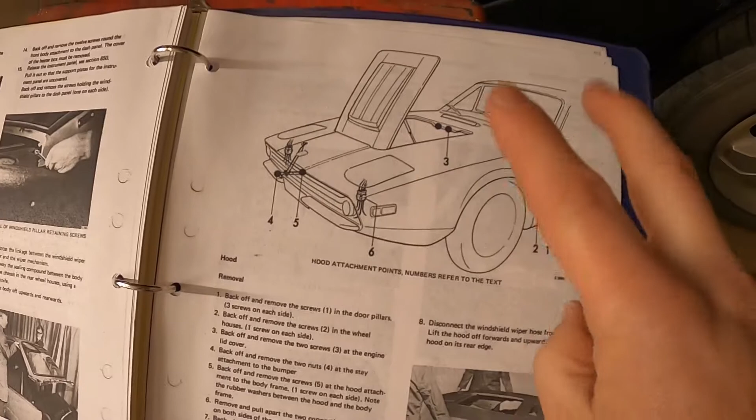Here's the chassis. Isn't that cool? Removal hood. Here we go. So that is the whole clamshell. They call this the hood and that the bonnet, but I'm gonna call that the clamshell. And there it comes off. So we're gonna do that.

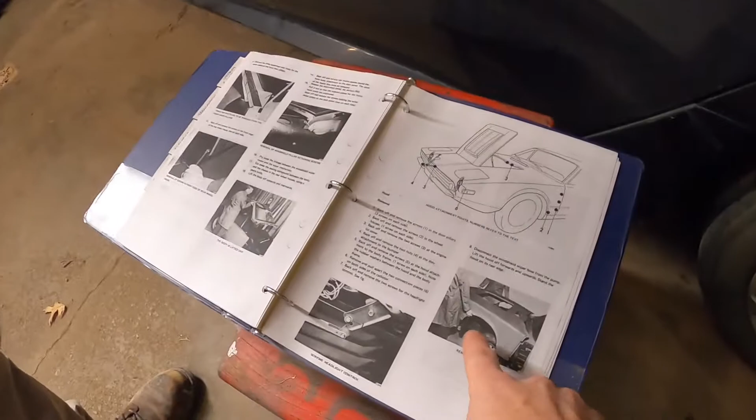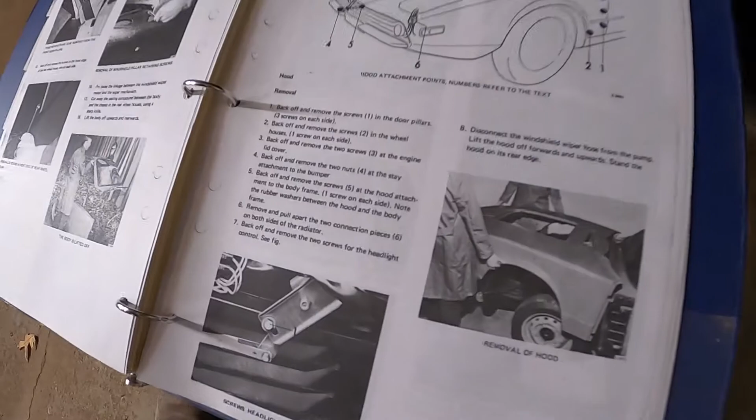Do you wanna be a historical reenactor for the Saab manual? What does that mean? We're gonna be those guys. Oh yeah, sure. It's like Civil War reenactors, but we're taking apart Swedish cars. I don't have a Swedish jacket like that. We might have to go sew some jackets real quick and come back. Okay. No, we'll skip that.

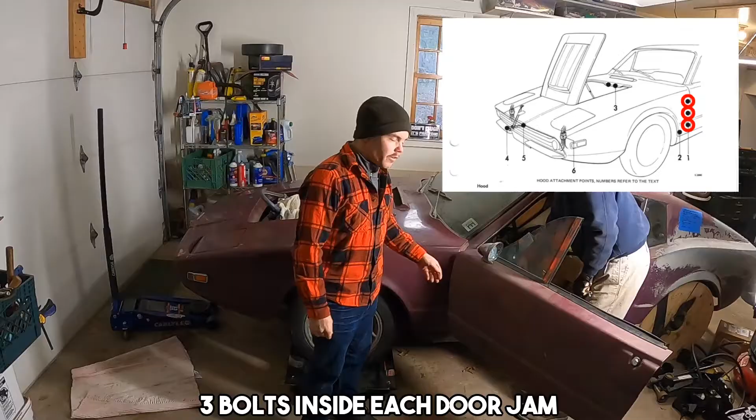All right, we're gonna call out instructions as we do it. I'll try to put it on the bottom of the screen and we'll see how it goes. First, we have 3 bolts inside each door jamb. 7/16. Make sure you have a nice wide garage because we have to put this on dollies to make sure we can get the other door open.

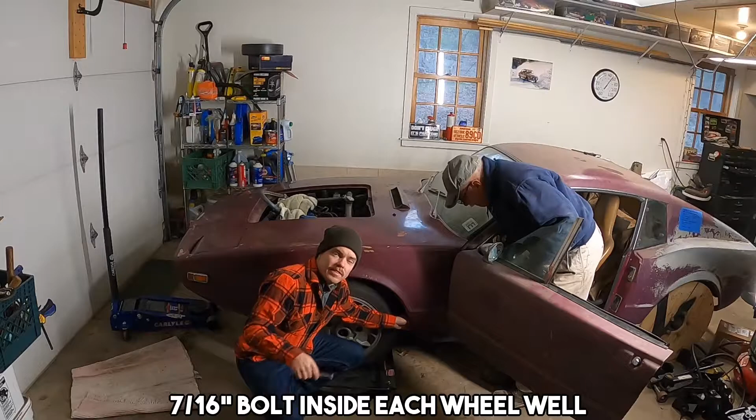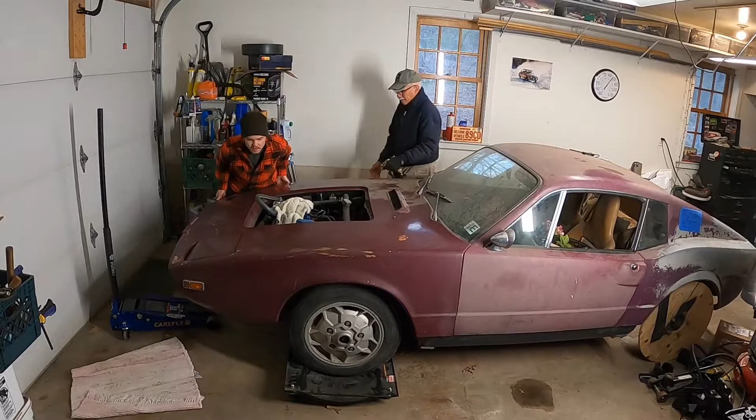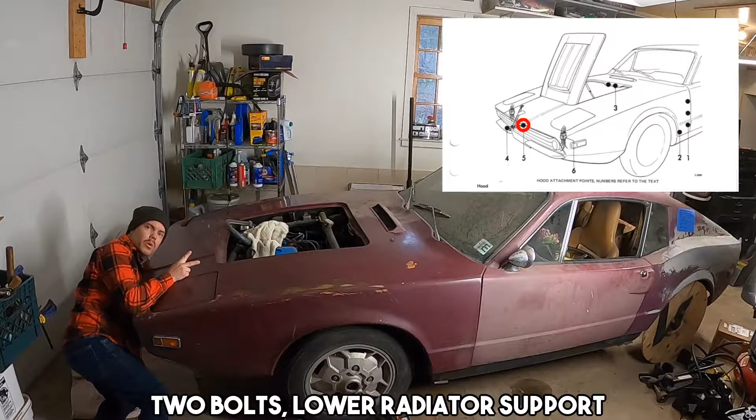We got 1 bolt on each side inside the wheel well. Right here, that's 7/16 as well, and it just screws out inside. We have 2 screws for the hood latch. We got 2 bolts down at the core support at the bottom. 2 nuts at the attachment to the bumper. That looks like this. 2 on either side.

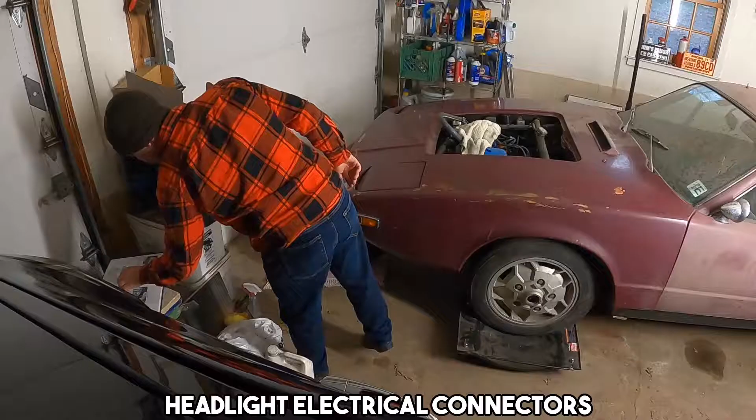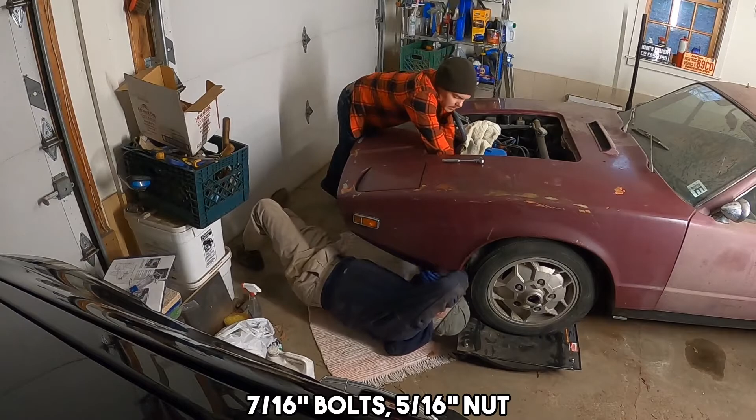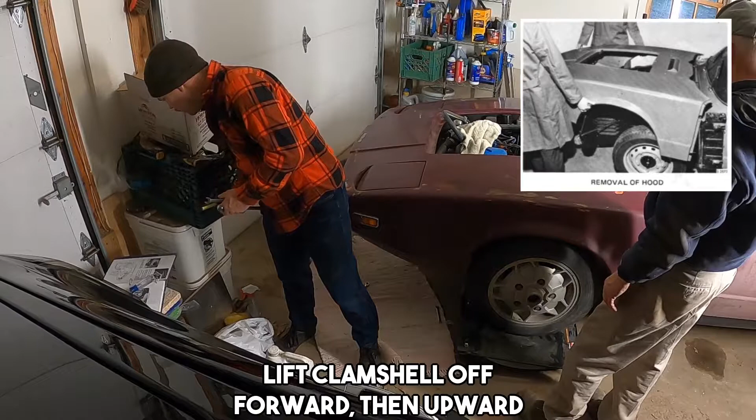We have 2 electrical connectors, 1 for each headlight. So I'm gonna take those out now. Back off and remove the 2 screws for the headlight control. See figure. Disconnect the windshield washer hose from the pump. Lift the hood off forwards and upwards.

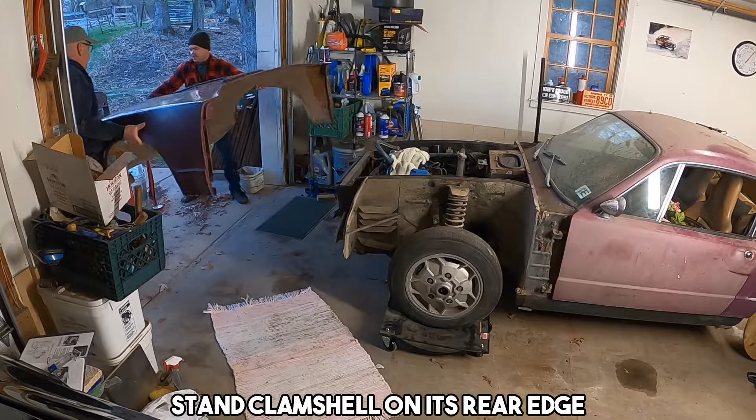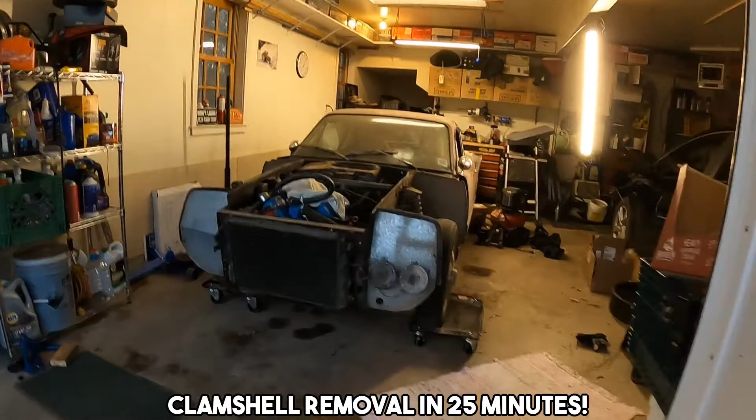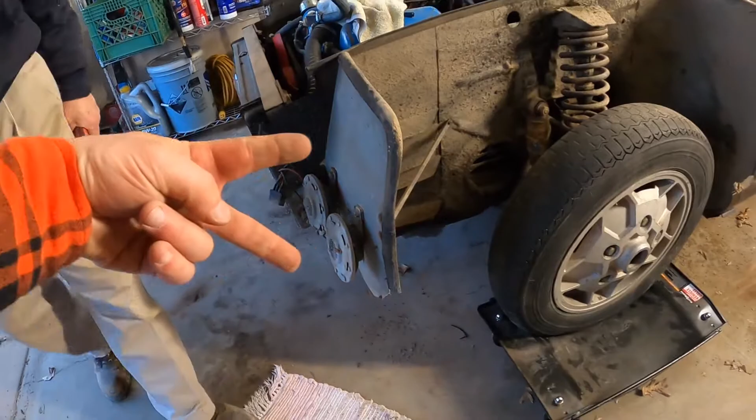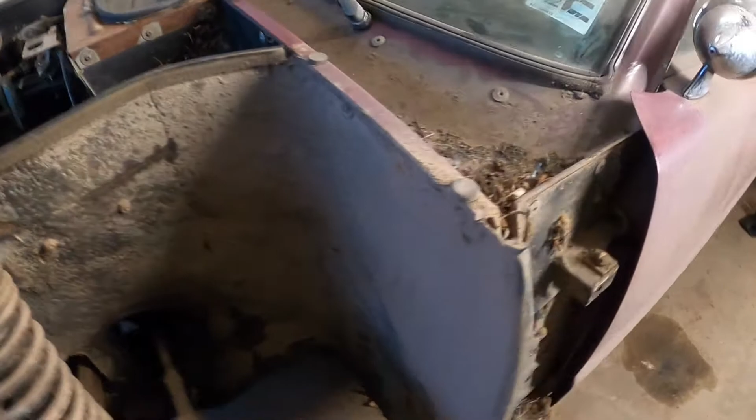25 minutes later, I guess, we get the thing off. That's what the Sonett looks like without a clamshell. So these are what we're getting hung up on because the car kind of wedges onto those. Very cool. Got some needles on here. Got some gross stuff everywhere. Oh yeah. Lots of stuff to clean out. Hey, at least that's fiberglass and not metal. Oh yeah, these pine needles.

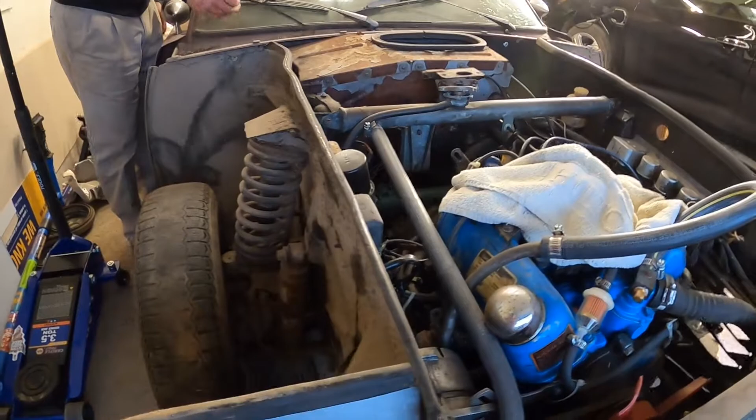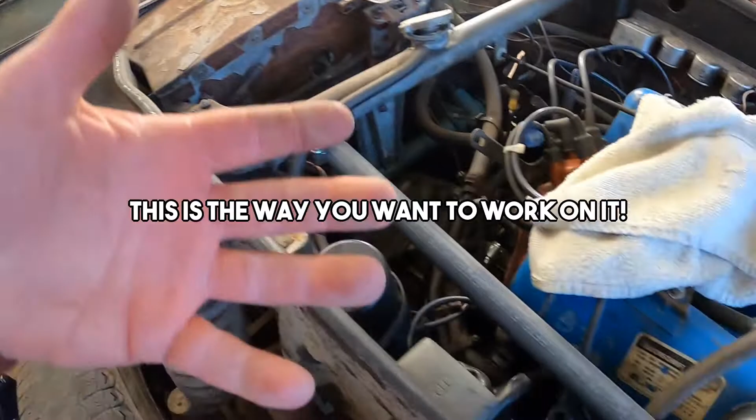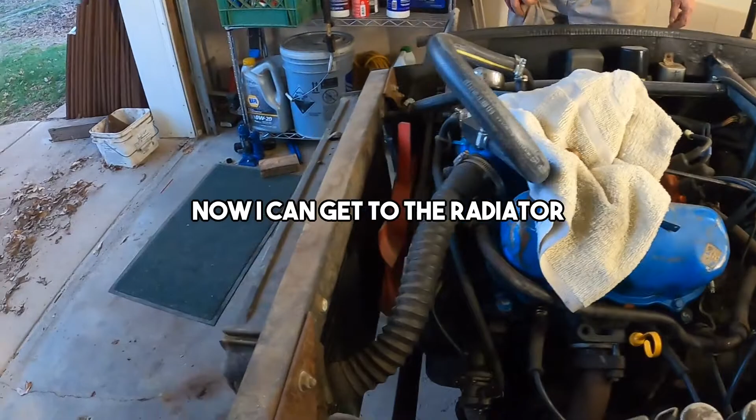So, this is really the way you want to work on the car. Wiper blade. Oh yeah. Nice. Glue that back on. This is really the way you want to work on it because you can get right up. You know, you stand right next to the engine. Somebody must have had a tarp on this once. Yep. So now I can get to the radiator super easy. Just a matter of 4 bolts. And that's what I was doing when I did the radiator hose in the bottom.

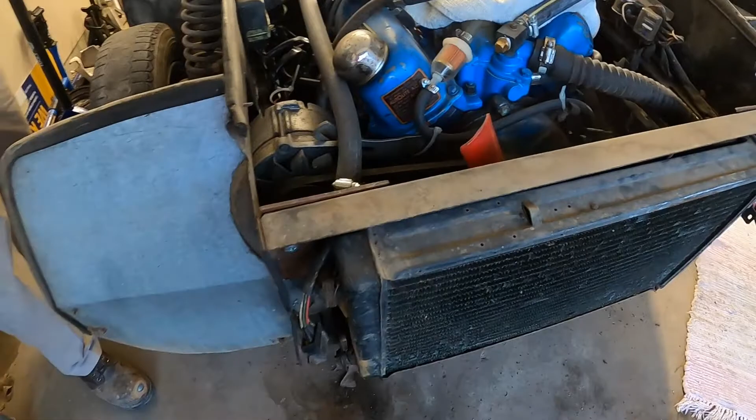But of course, it's like you need some new shocks. Really? You think those shocks might be a little old? I think they're brand new.

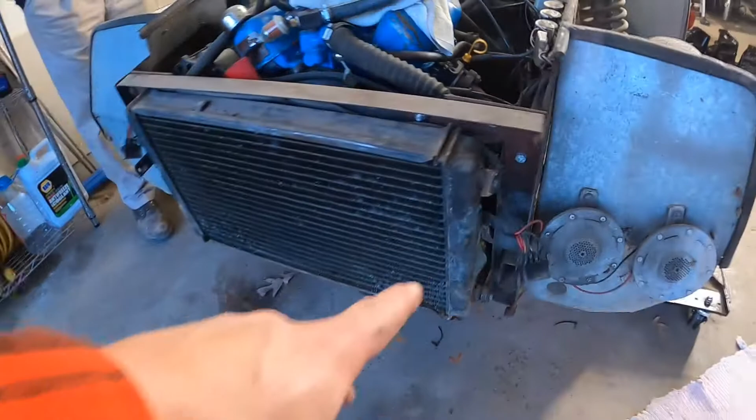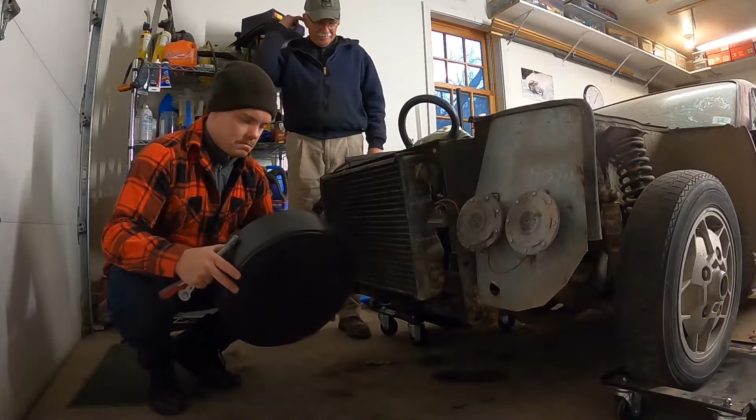But no, the radiator's 4 bolts. So now that the nose is off, I could just unbolt it and take it out. Oh, all straightforward, yeah. You want to help me do that? Sure. Okay, time to pull the radiator. We do have 2 of these. These are containers for fleet line brake rotors at NAPA. So if you buy like semi-truck brakes, they come in these nice bins. So I'm gonna put 2 bins under here so I can catch any leaks, because they're gonna come out. And we'll get working on those bolts.

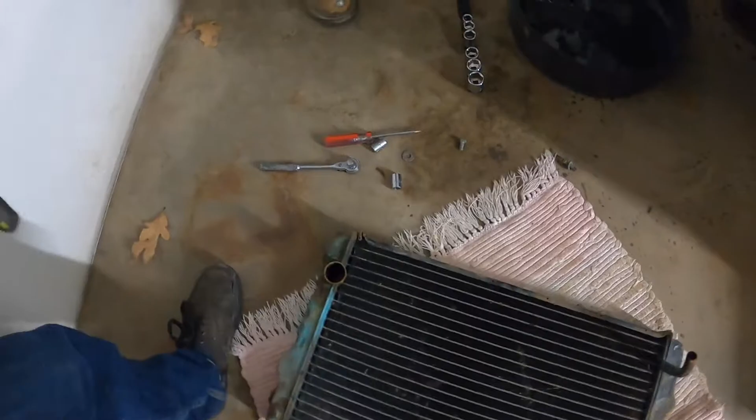So I believe the hole is right over here, and you can see the drips all the way down. But I'm gonna take it to a radiator shop. There's one in the Twin Cities here, and get them to kind of flush it, restore it. Hopefully don't have to recore. I think the core looks pretty good to me, but it's got a few rocks you can see in there.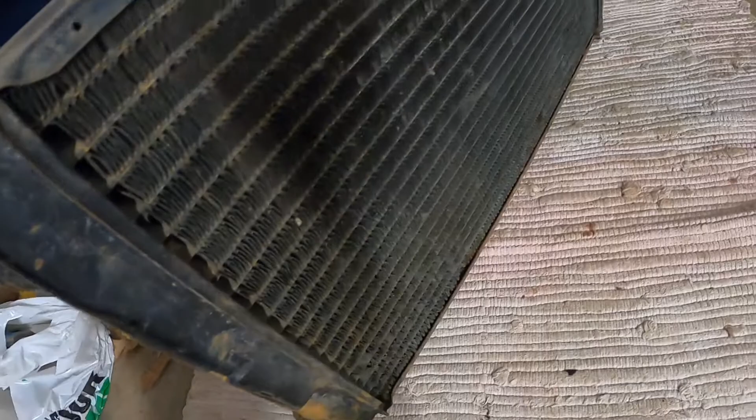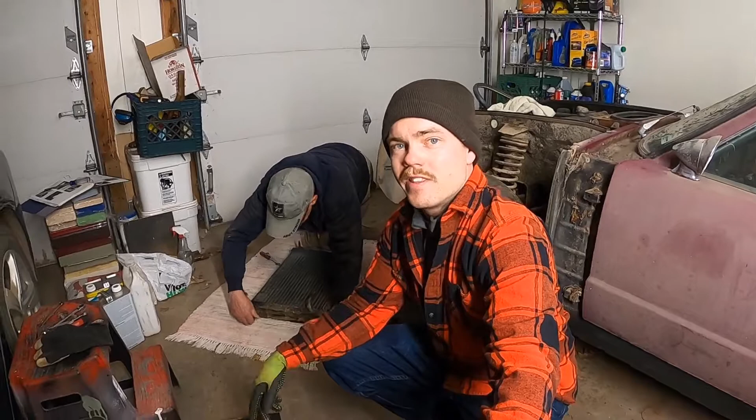Well, that was about 40 minutes for taking the whole clamshell off and pulling the radiator. I think that's a pretty good feat, and it's really not that hard if you have 2 people. Just get in there with a 7/16 and a 1/2 inch, and I think like a screwdriver, and it's out.